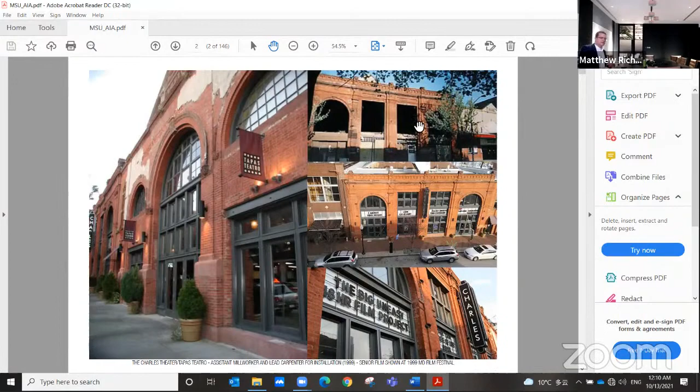I also became the lead carpenter on the installation for the Charles Theater, where I installed the whole facade. I worked with Steve, we built it, and that was a great project. On opening day, I also got to show my senior film from film school, so it was quite a nice project to be involved with.

I also started doing my own projects. I got my contractor's license and would take historic barns and historic houses in Mount Washington and renovate them. This was my main project—this is the house that I still own. I bought it when it was in very poor condition.

This is one of the first 6 houses in Mount Washington. If you look here, this is the American AIA chapter, Baltimore chapter from 150 years ago. One of these guys, this was his house, Thomas Dixon. He's also the architect for the Mount Vernon Presbyterian Church and the gatehouse for, I forget the name of that building. Anyway, very prominent architect in the 1860s and 70s in Baltimore, and this was his rural Gothic cottage.

So I bought it, it was in very bad shape, and I restored it. It took me about 7 years. I won the Mount Washington Improvement Association Award, a CHAP Award, and a Maryland Historical Trust award. This is some of the interior, some of the details that I restored on the inside. This was a great project. I got to live there for a little bit, and it was kind of a culmination of my carpenter career.

In school at Morgan, this was my second year studio project. We joined a competition, and I actually was lucky enough to get 3rd place in an international design competition. From that, AIA decided to sponsor me to go to the AIA meeting in LA that year, which was a great honor. I got to go out to LA and see the case study houses and go to the conferences and learn a lot more and get exposed to a lot more.

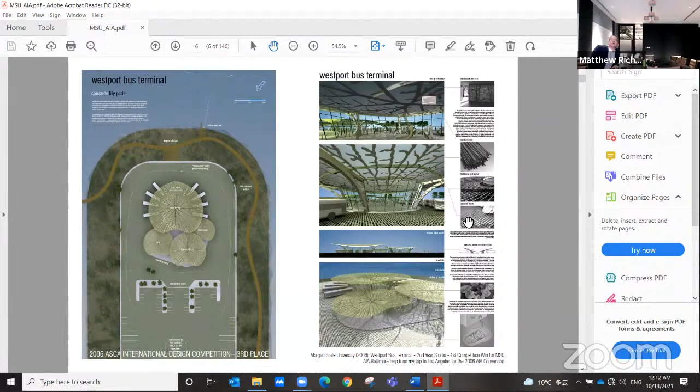This was my senior thesis project I worked on with Steve, and this was a proposal for, at the time, the Contemporary Museum. We chose a site which was a parking lot, and I don't know what it is now. So I went out and did field studies. I did all the CAD drawings for all the buildings nearby, and I tried to basically design a building that I thought would fit into the urban fabric as well as be something new. This was something I was very concerned with at the time. I kept reading a lot of articles, maybe with Ed Gunts, or just being part of the Mount Washington Improvement Association.

Just like, what can you do in Baltimore? It seemed very conservative to me, and I wanted to challenge that.

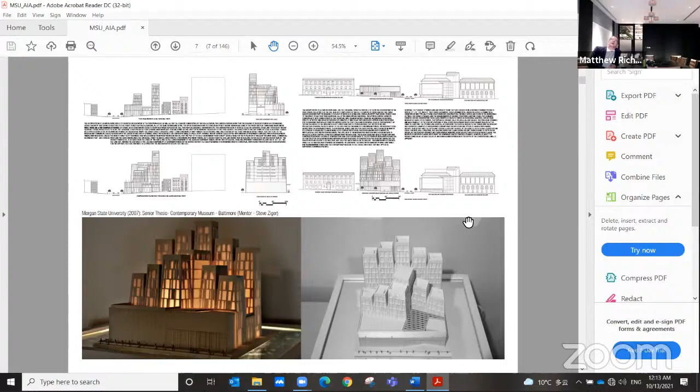So here's some of my intern work. This is a project Charlie did, a renovation. I just did what interns do. I went out and did measurements and basic drawings.

This is with Doug. What was this? The National Cryptologic... oh, maybe I shouldn't say. Then I worked with Steve on the Rashfield proposal and the Gilman Library extension. And then these were with Parameter. This is Silo Point. I got to do reflected ceiling plans and then some elevations for the Learning Center in Hampden.

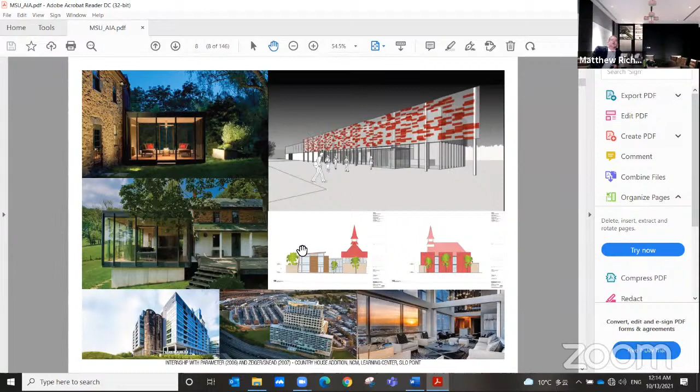So these were great experiences, and it was really fun to work with those guys. Here are some of my classmates at Morgan. I was there from like 2004 to 2007.

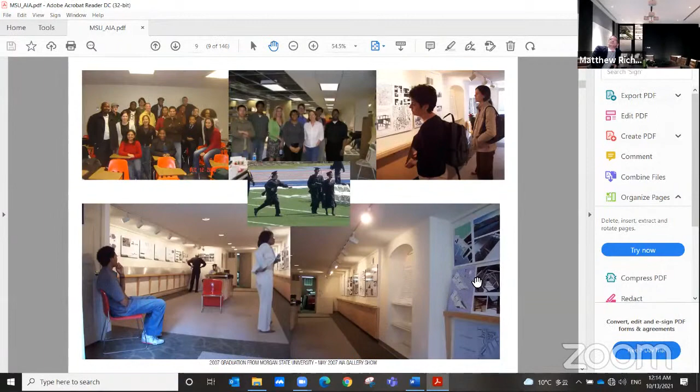Jay and I, after we finished our studies, we did a gallery show in the basement at the AIA, and that was a great experience. Then I graduated — you can see me here. Here's Jay and I'm running across the football field with my degree. I was very happy to move on to the next chapter.

At the time, I was exposing myself to a lot of lectures. I really didn't know architecture — I kind of came to architecture later. My friend said, your bus pavilion is really nice, you should see this artist, Zaha Hadid. She has a gallery exhibition at the Guggenheim.

So I went up to New York — this is 2006 — and that was a fantastic show. Then there was another one at the MoMA called On Site: New Architecture in Spain. Here's looking into the door there. This really opened my world to this amazing contemporary architecture that's going on.

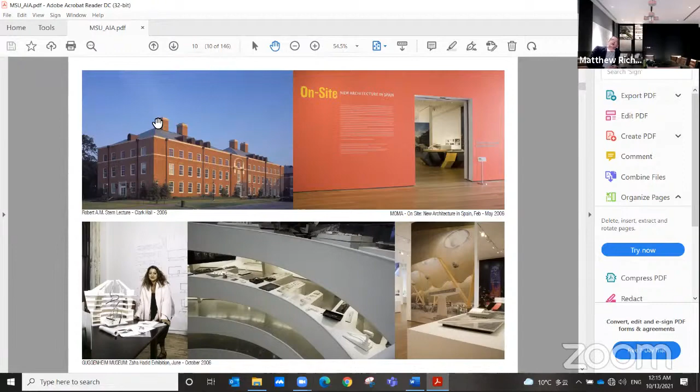I also went and saw Robert Stern speak in Baltimore, and I was very turned off by his speech. He was just very kind of arrogant, really talking himself up. And I was just like, which direction do I go?

And there was nothing there. So I basically pounded the pavement for 2 or 3 weeks. I went to every design office that I could in Barcelona. There were about 35 of them, and I finally got lucky to get an internship.

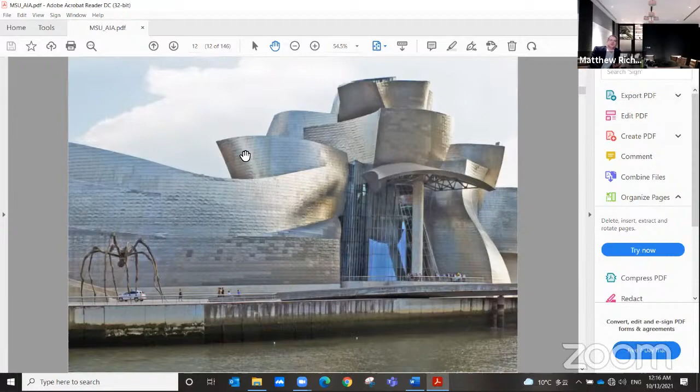So this is the Bilbao Effect. This is right after Frank Gehry's Guggenheim Museum. Every city in Spain wants one of these to be something special, so Spain is investing a lot of money in contemporary architecture. This was very exciting to me. These are some of the buildings that I would see.

So I was doing an internship, and on the weekends I would just, they had these like $50 airplane tickets. You could fly somewhere in Spain and then rent a $20 car, a little Pepe car. And I drove all over Spain, and these are some of the wild things that I would see.

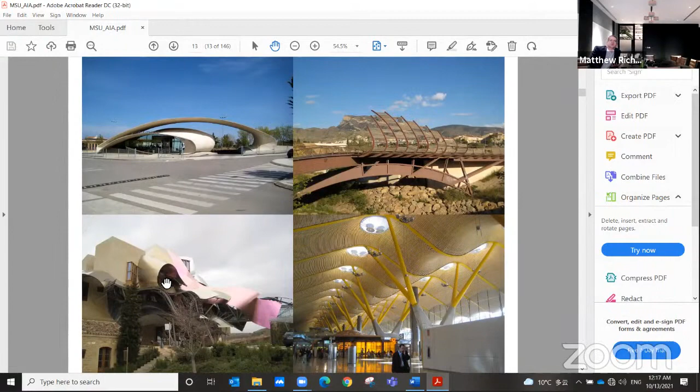This is an airport. This is Frank Gehry Winery. This is just a bus station by a professor, a Spanish professor. This is Enric Miralles' Bridge.

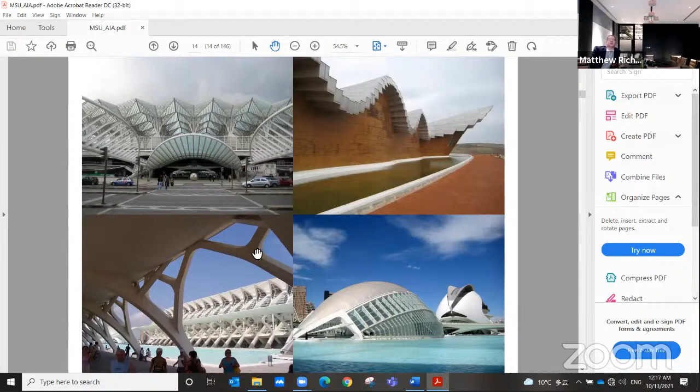And then there's Santiago Calatrava, just one of my favorite architects. He does this really wild, innovative work. I'm sure if you haven't heard of him, you should look him up. But it's great work. And then this is Herzog de Meuron.

They basically took this brick warehouse, cut out the bottom floor, lifted it up, and did this amazing structural lifting to open up and invite you into this museum. And with this green wall, this was a great project.

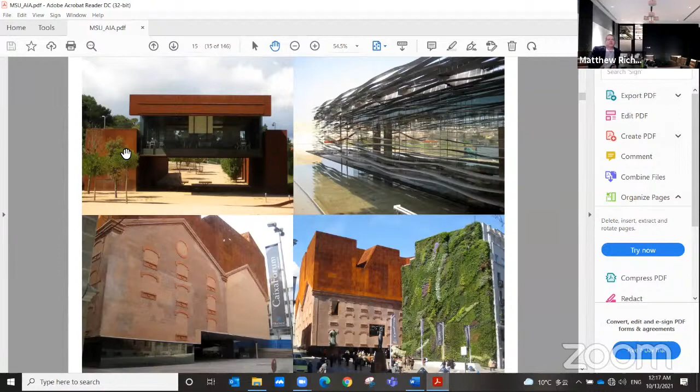And then on the top is RCR Architects. They did boxes, fantastic boxes, just lifting, pushing, and pulling. I would say in Spain I saw just a lot of box projects, amazing boxes, anything you can do with a box.

And you'll see later on, I'll show a bunch of buildings that are inspired by form, but I think fundamentally I learned a lot in Spain by seeing what you can do with a box and what you can do with a budget. That was just a great lesson for me.

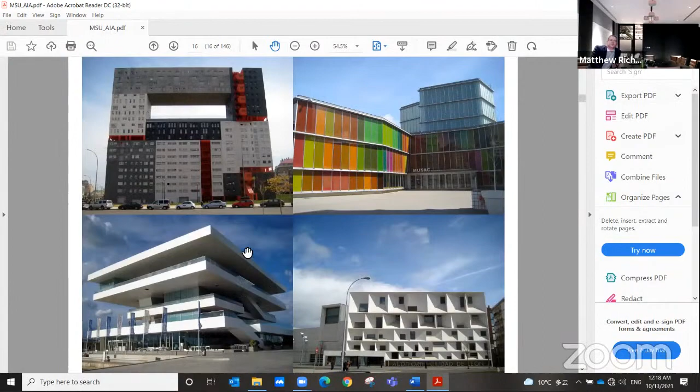This is Mansilla Tuñón, two great projects - this is the Museo de Arte Contemporáneo, and this is a music hall. This is David Chipperfield. This is MVRDV, a housing project.

So I got my first internship with this guy, Fermín Vázquez, and he was a local architect collaborating with Toyo Ito and Jean Nouvel. I was very fortunate to get my first project working on a Jean Nouvel tower. This was kind of post opening, just doing building a model.

And I got to build some models for Toyo Ito, and this was just, straight out of school, I was so excited. But on that job, I couldn't pick up Spanish quick enough, and they quickly learned that I wasn't really adding to the conversation.

So I was back on the street, and a couple of weeks later I landed a job at Enric Miralles' firm. I really encourage you, if you haven't been exposed to his work, it's amazing. He's considered one of the best Spanish architects. He unfortunately died in 2000 during the construction of the Scottish Parliament.

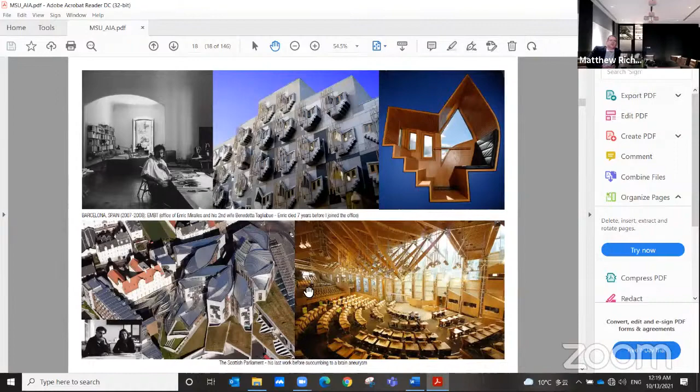One of my favorite stories about him is that he got to a point where he was really tired of other architects, or he felt he had learned everything. He took all of his architecture books and threw them in the dumpster, and said he's never going to look at anyone else's work again. He just drew and kept drawing since then, and created some of the most interesting work.

This is a roof that he did in a fruit market in Barcelona. This is a Gas Natural tower with a huge cantilever. This is archery for the Olympic Center. And he does amazing parks.

Now, one thing I did learn there - what we did was just a lot of copying. Since he was not around anymore to design, we copied a lot of designs and did competitions. We did what was called the Miralles Curve - he takes a line and another line in landscapes and gives it a fillet. This seems very basic, but this is something that at the Zaha Hadid office they had basically picked up on, and this was one of her favorite architects, and she uses this a lot if you go through and study her work.

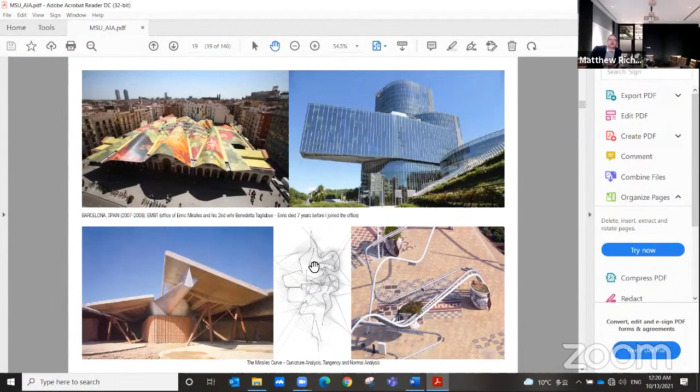So I did some animations, I did some 3D modeling, and I worked on basically two or three competitions there. And then this is 2008, and the Spain economy tanks. They're like, we're sorry, we just can't, we have to let a bunch of people go. So this will be the first time the economy kind of affecting my career.

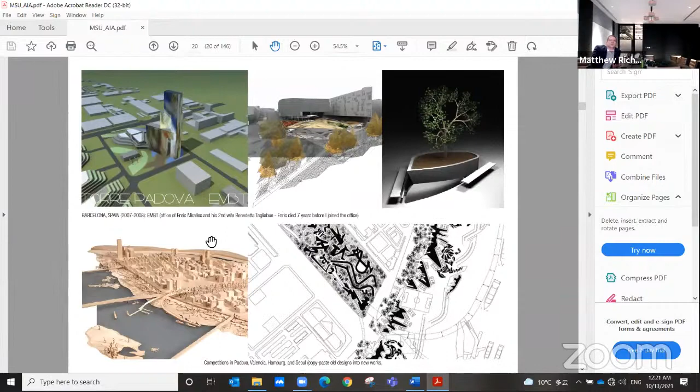So where do I go next? I got very lucky and landed a job at Lead Architects. I'm still not sure how I did it, but I was very persistent. I think I was brought in because I had construction experience and was a little more mature than the design team. So I was running the consultants between the MEP, the structural, and the client, holding conferences with all these on this first tower.

This is in Dubai. This tower never got built because it collapsed during 2008. This was a competition we did in Bulgaria. Kind of a fun project. I won't go into details, but this is some of the modeling I did.

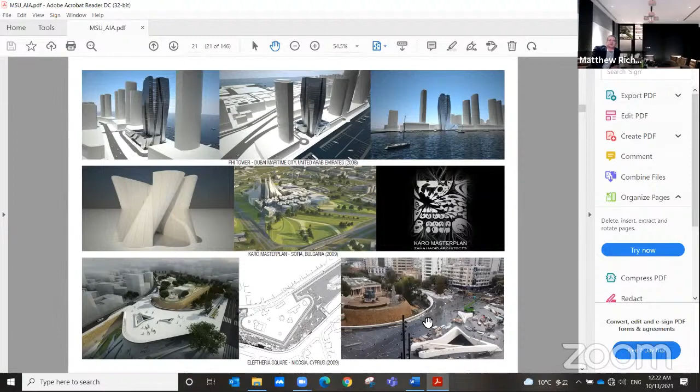And then this was a master plan for a park in Nicosia, Cyprus. They're building a bridge and a public park around an old wall. This is a walled fortress city, and this is the old wall of the historic city. So here I am getting to do contemporary design within an existing historic setting, which was very exciting.

Then I'm jumping around a little on projects. These are some of the Middle East projects I worked on. This is in Cairo, an exhibition center. There were 3 exhibition centers, a hotel, and apartment towers. I just kind of did some elevations and some 3D modeling.

And then this was going to be, believe it or not, Muammar Gaddafi's son, Saif al-Islam Gaddafi — they wanted to build the UN of Africa, and this is the People's Conference Hall, which was going to be the UN building of Africa. Basically this is 2011, the Arab Spring hit, and the office lost 8 projects in 1 week.

And they tried to hold on for a while, but basically they had to let a quarter of the staff go. And that was another time where I'm without work. Do I come back to Maryland, or where do I go? I decided to go back to China.

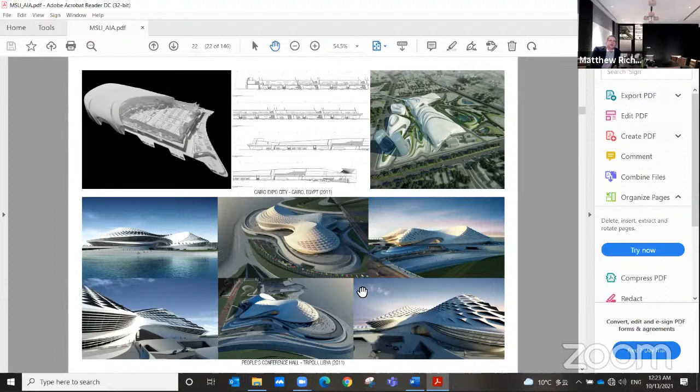Now I'm jumping around the timeline a little, but I want to basically introduce China. What is China? China is like an enigma to me. When I took my first plane ride there, I felt like I was going to fall off the edge of the earth because it was so far away, and I had never been there. I never considered living there or learning the language, and in school we didn't really study it.

And then as the economy opens up and starts building in the 2000s, it starts to become like a testing ground for new architecture. And because all of this Soviet or communist architecture is failing and these buildings need to be renewed, they're basically wholesale blocks getting torn down and redeveloped. This is a really exciting time.

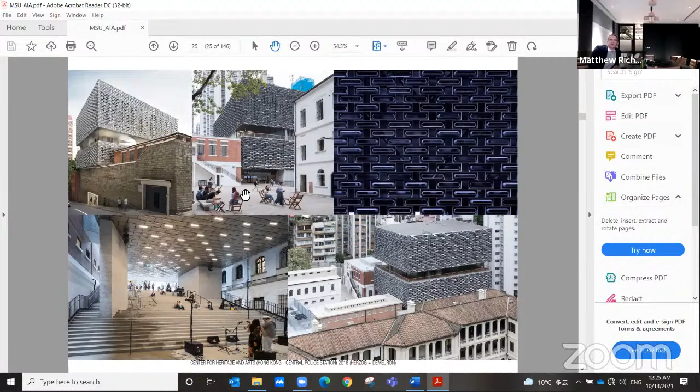This is kind of like a modern interpretation of a brick. They improve the public spaces. Herzog & de Meuron does a bunch of neat projects.

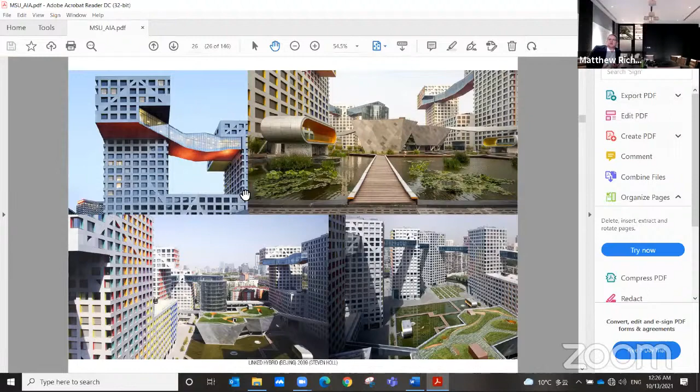This is Steven Holl, back around the Olympics time. This is a residential project. What he does is line the perimeter with buildings and link them by sky bridges. In the interior is this fantastic public space, and there's an art cinema called the Kubrick Theater that shows art movies. There are just some really nice public spaces you can hang out in.

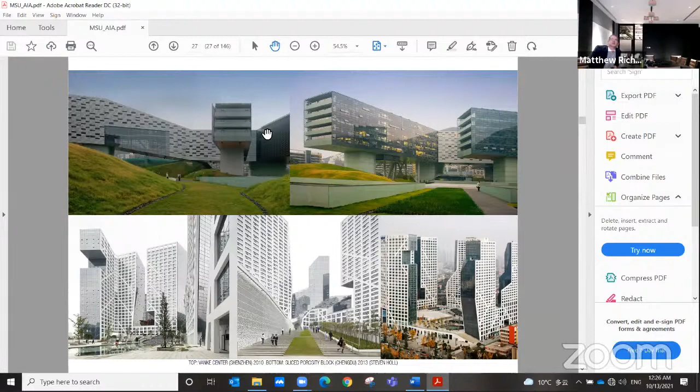He's also done a project in Chengdu called Sliced Porosity. Similarly, he runs the perimeter with buildings, creating dynamic public spaces on the interior. Then a project in Shenzhen called the Horizontal Skyscraper, the Vanke Center. He does really nice connections and basically lifts the buildings off the ground plane, with a lot of interesting public spaces underneath.

Okay, his name has just escaped me—he's a British architect, it'll come to me in a second. He did the Shanghai Pavilion. Someone wants to chime in? A bunch of my friends work there. This is a really neat Shanghai Pavilion that I got to see in 2010.

This is all seed banks, and these are plexiglass rods that let light in. This is the interior, with light coming through the seed banks. It's just a very fun pavilion.

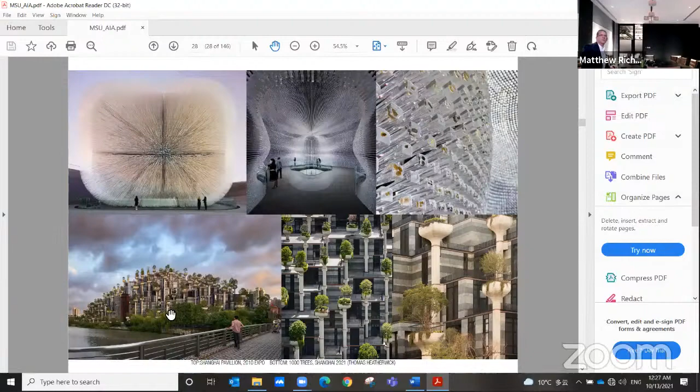From this, he gets the 1,000 Trees residential project, which is mixed use. There's retail in the base, and basically each building has its own tree. He's done...

Thomas Heatherwick. There we go, Thomas Heatherwick. This is on the Bund in Shanghai—a performing arts theater with a facade that kind of mimics bamboo. This facade rotates; each of the 3 layers will rotate and create a very interesting effect, exposing the building in different ways throughout the day.

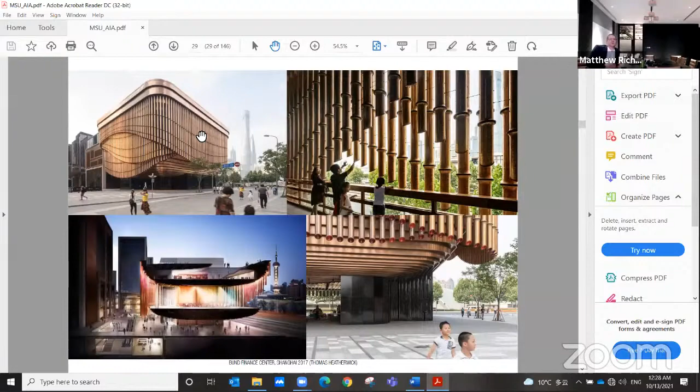You can open up the gallery to experience the inside, and there's a very nice public space underneath.

One thing we talk about is how to control the details. As foreign architects, we're not licensed to practice architecture here—we're basically a design consultancy, and only the LDI, the Local Design Institute, can stamp drawings and do construction drawings. So we work on a conceptual level and review the drawings; how closely you can manage the details depends on how the contract is arranged. KPF, Foster and Partners, and GMP are the three top firms that are able to get their specifications into the contract and really manage the details. They do nice work.

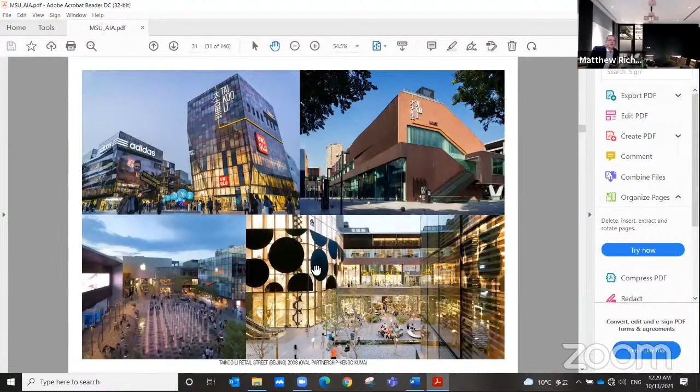This is called Taikoo Li, a retail street. It's a very innovative project that tries to mimic the street corridors from an old hutong, very closely, but with 2 or 3 levels, creating a 3D shopping environment that's outdoors.

This is another one in Chengdu also called Taikoo Li, with a more traditionally inspired architecture with a modern flair. That's a very nice project in Chengdu.

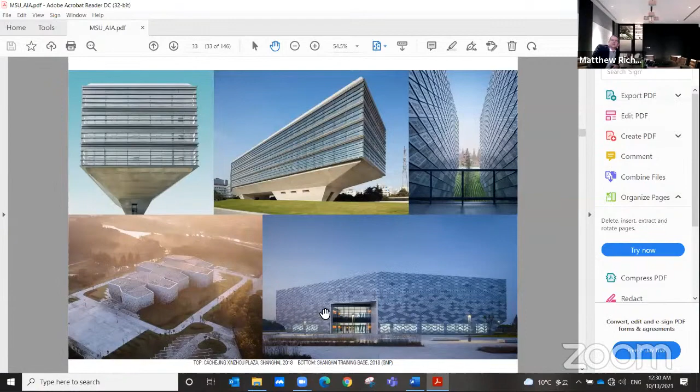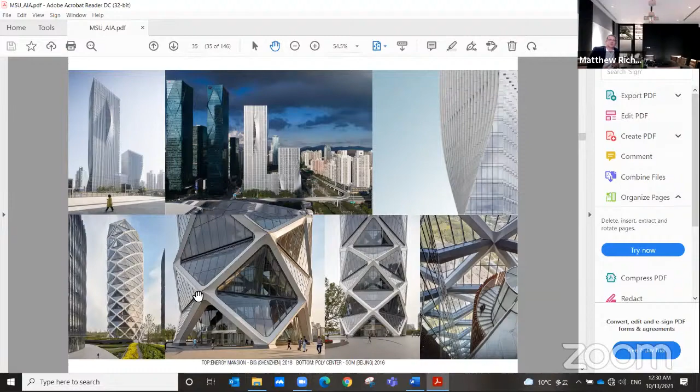This is BIG—Bjarke Ingels does some very simple news-worthy designs within a budget, and this is a very nice project tower in Shenzhen. Then this is SOM in Beijing. So again, I'm just trying to scratch the surface of some of the projects I find really interesting, that I found when I arrived or that got built after I got here.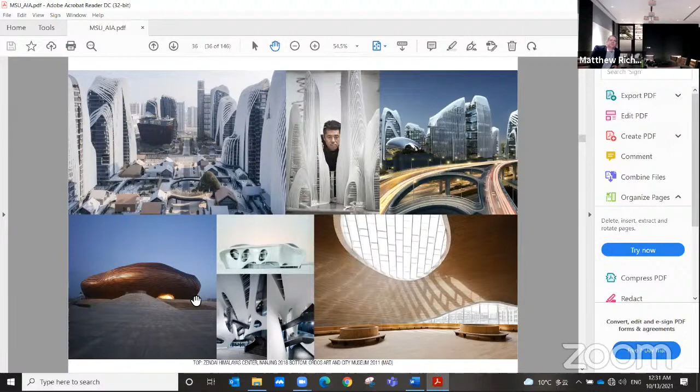This is an architect, a Chinese architect, Ma Yan-song. He worked at Zaha Hadid around 2002 or 2003, a couple of years before I joined. Then he went back to Beijing and started his own office, working in this style but taking it much farther.

He's gotten maybe 20 or 30 projects built here. This is an opera hall, very nice interiors, very sculptural. These are the more sculptural projects that get built. And this is in my neighborhood, I live right down the street from this.

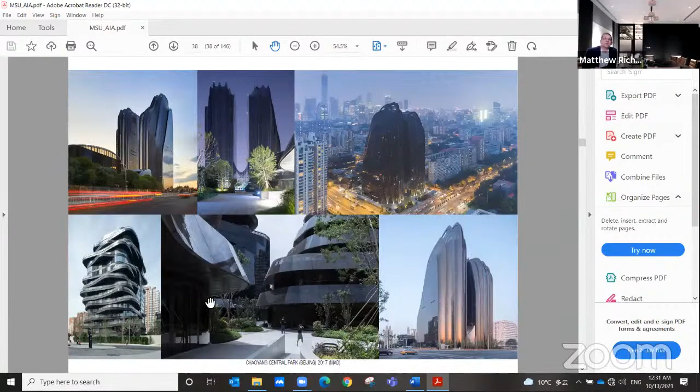This is an office building, and right next to it is an apartment tower with some retail around it. Very nice mixed use project. Then across the street from that is a TV station.

So let's go back. I'm working at Zaha Hadid in 2008, and I just get there, and within two months I get this email: we just won this project in Beijing, does anyone want to go? And I'm just like, that sounds great, but I want to stick around and see what happens.

So I'll come back to this. This is the last project I worked on, a competition in Nanjing that they won. These are two towers, a youth cultural center, and a hotel. Very nice mixed use project.

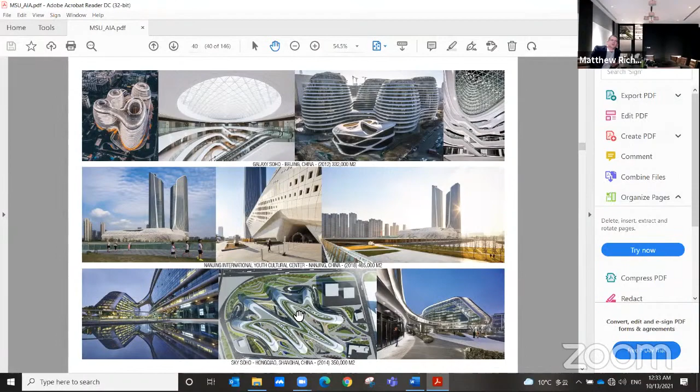Then this is another office building project in Shanghai. Friends sitting next to me were working on it, and it got built, and I got to visit it. Very lovely building. So my turn comes in 2010.

They won another competition, two towers. I jumped on that, took the flight to Beijing, and joined the team. They immediately had problems with planning and needed to come up with a new design. I was just one of about 5 people in the office that day, and we all came up with a proposal.

They were even walking into the room, almost forgot my model, but they took it in, came back half an hour later and said they love your option, Matt, it's going to be built. Fortunately, my option got built and got detailed.

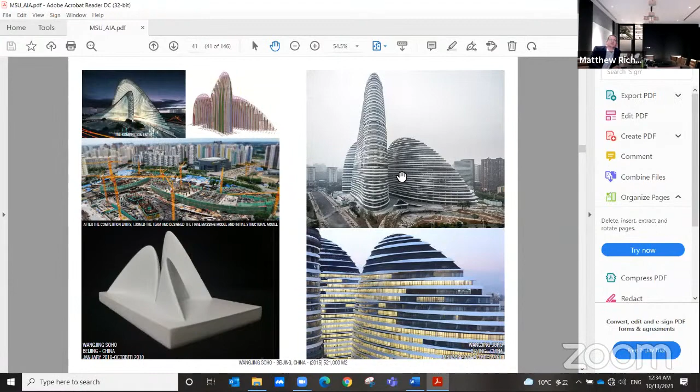My friend came up with the facade design, and I ran the structure team. I built the structural model in Grasshopper and was fortunate to interact with the LDI there. This was just an amazing stroke of luck to be in the right place at the right time, and this project got built. I can see it out of my apartment window, and also from work, so it's kind of special to me.

It's a lovely building, and it also has really nice plazas and public spaces. The landscaping is quite nice, there's a sunken plaza that steps down, and some waterfalls. If you go there on the weekend, there's tons of people out playing and utilizing this space. It's a great resource for the neighborhood.

It's not the best for retail, that was kind of designed last minute, so it has some failures. And of course there are some office spaces with diagonal columns that make it kind of challenging, but it's got a wow factor that's fun.

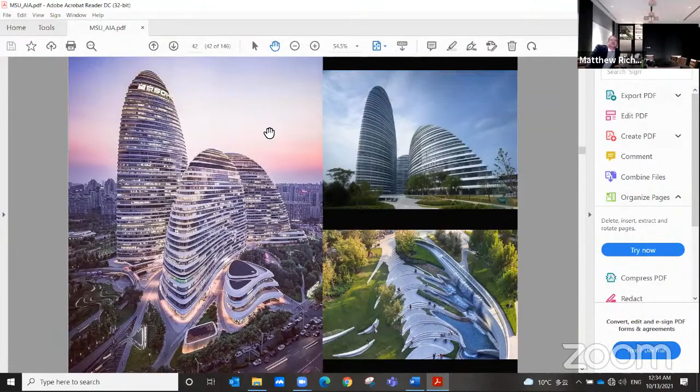Another friend of mine got to work on this. This is the largest airport in the world, Beijing Airport, which just opened a year or two ago.

I had actually moved back to China after Zaha Hadid, and I joined Foster and Partners, Norman Foster, and got to work on their competition entry. So it was Richard Rogers, Norman Foster, and Zaha Hadid, and maybe one or two others. Zaha Hadid won, and this got built, and this is probably the best detailed building.

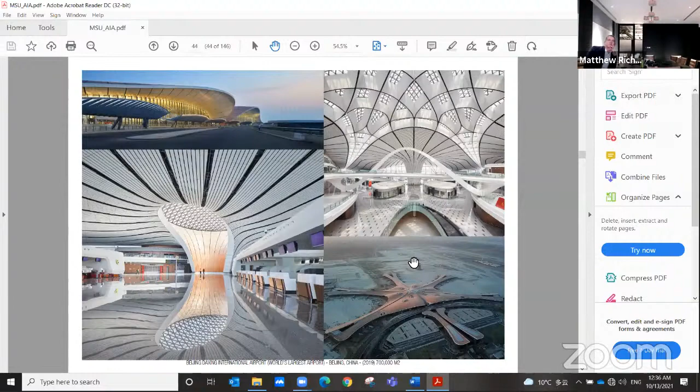These two are actually really built quite well. These are unitized glass curtain wall, and the LDI did a really good job with this building. The first Zaha buildings I showed you in Beijing, China have details that are pretty poor. They were built really quickly, but by now the quality's improved.

Now I'm working at Foster. I joined, and this is a project in Nanjing. I think it's a 300-meter tower or something, I can't read the bottom of my screen.

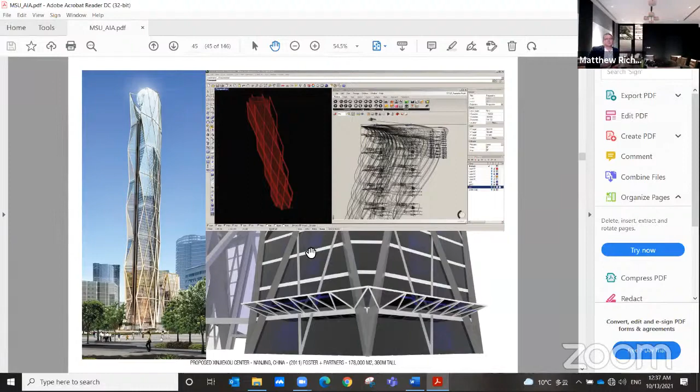I got into Grasshopper and started scripting, and used that for a couple of years, then I quickly learned that the kids younger than me were much better and much faster. So now I just kind of monitor it, but this was a great tool for scripting. I was able to run the structural models and help build the facades, and it really helped make things go a lot quicker when doing projects.

It's a great project. I was kind of upset they left me out of the competition, and I made a poor decision. I was upset with management, and being in Hong Kong, I wasn't in the main office, so I left Foster & Partners. I think that's one of my biggest regrets.

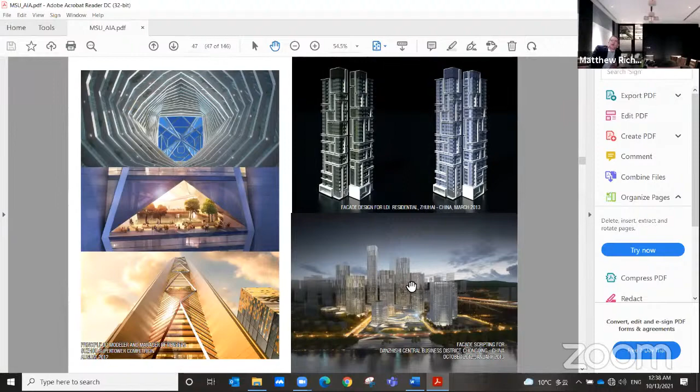I scripted these facades for an office development in China. Then we did a proposal for an airport, like an office complex next to an airport. We had to do a low rise, and I was kind of inspired by the Steven Holl project, so this is kind of my horizontal skyscrapers.

I started working for another guy doing some contemporary townhomes in Hong Kong, and kind of jumped around a little. Then one day I was just sitting out of work, on the beach, drinking beer on a Monday at 1 p.m., and I got an email in my inbox.

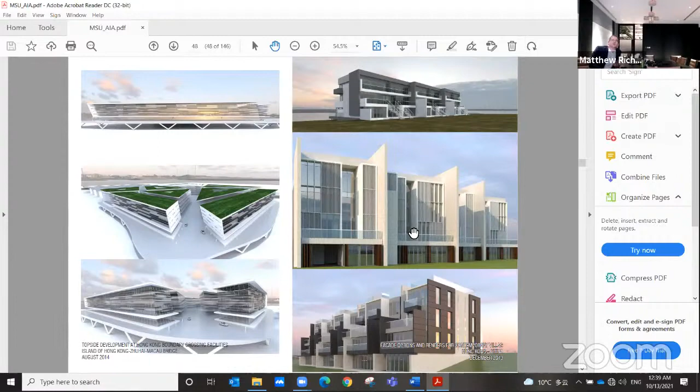A guy says, I got a great job for you in Sri Lanka, it's for a guy named Cecil Balmond, are you interested? I said he's my hero, I would love to. So let me give you a little introduction on Cecil. He's this really kind of guru structural engineer. He worked at Arup, started in 1969, and tries to study nature and integrate forms in nature into structure.

He started in 2000 what's called the Advanced Geometry Unit. He basically hired a bunch of mathematicians, engineers, architects, programmers, and artists, pulling this group together to see what you can take from music and artwork and nature, study the patterns, and bring that into our structural team, and start coding it. They start doing coding, which is very influential, and he was one of the first at the forefront of bringing Grasshopper script coding into geometries, into architecture.

He also did what's called the Serpentine Pavilions in London, starting around 2000. Every summer they invite an architect who hasn't built in England to do a pavilion.

He did the structural engineering and design work with Toyo Ito on this one. This was Alvaro Siza, and this is OMA. He works with Alvaro Siza, basically doing the structure, and they do this draping pavilion for an expo in Portugal. It's a draping piece of concrete that encloses a public space, just this amazing catenary arch.

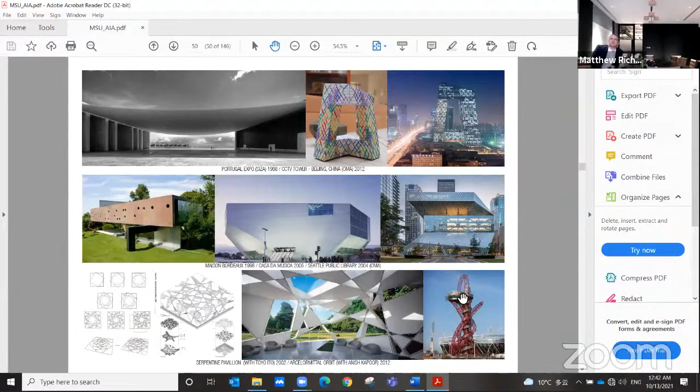So fast forward, I'm working in Sri Lanka. These are some sketches. He's teaching at UPenn at the time and flying to Dallas on a project, sends me from the airport some iPhone sketches on an app. He's like, this is what I want you to do.

And I basically developed it into this model right here. I do all the Rhino modeling and all the designing, and I'm living in one of these buildings, looking at the site from my window at night and traveling Sri Lanka during the weekend. I'm there for 2.5 years and do the whole facade package and construction drawings.

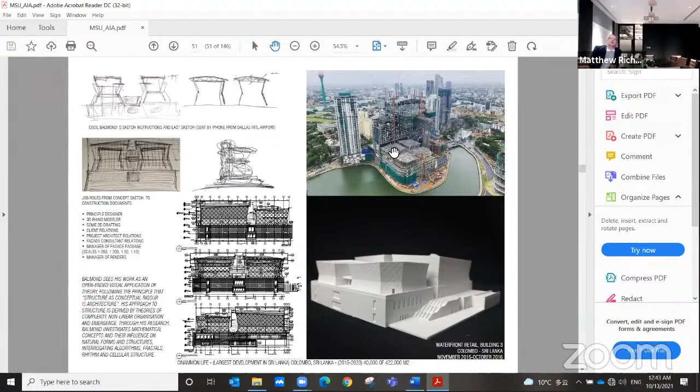This is for a retail mall, the largest project in Sri Lanka. It's on top of a parking garage backed by a hotel, with office towers. It's a crazy project with some crazy cantilevers. I think it's a mess, but it's also kind of fun.

These are renders of my work that kind of stick out. This is the shopping mall, with outdoor pavilions facing the waterfront and outdoor dining. I need to keep rolling.

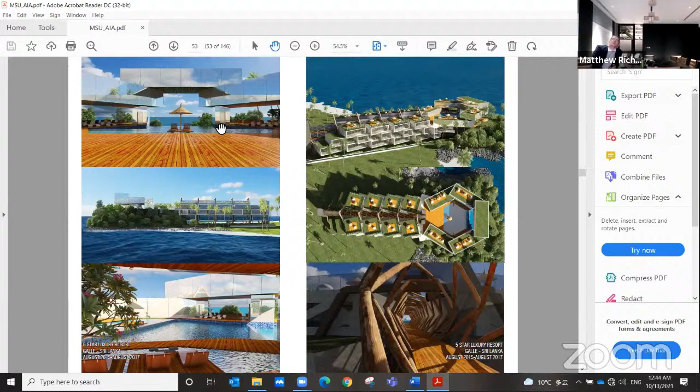This is a resort that I helped design with them. These are inspired by honeycombs, and they each turn and face the ocean, resolving in a final geometric area with a pool facing the water. Really nice project, I think under construction too.

Then I moved back to Shanghai. I get a design director job with a lady who works at KPF, and we do a bunch of proposals, including for a 500-meter super tall tower in Xi'an, another city in China.

These are 2 proposals that I did, and this is the atrium that I modeled and designed. I don't think this project is under construction.

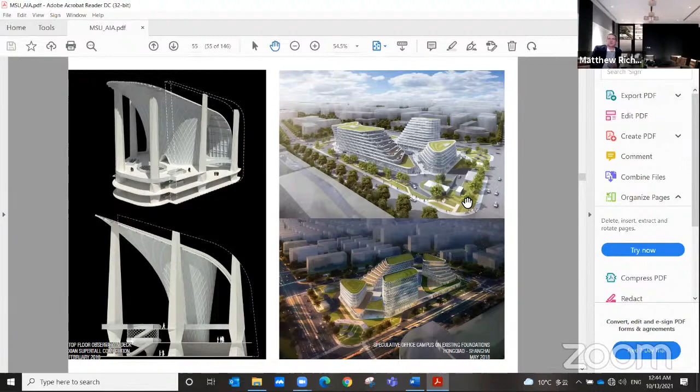These were for a project in Shanghai. The basement had already been built, and the developer wanted a newer design for the office. So we tried to design with outdoor terraces and create some outdoor spaces.

This was some spec offices that were going to have air conditioning units in the windows, and I had to come up with a pattern to basically hide all of those grills so you didn't see the air conditioning units on the face.

Then I moved to Gensler and worked there for almost 2 years. These are some proposals. This is a tower where I did the sky lobby.

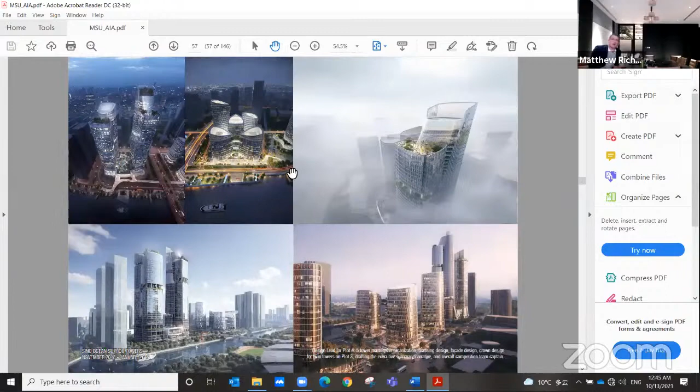I see I'm running out of time, so I'll flip through a bunch of these. This is another tower I did with 4 sky lobbies, one facing each cardinal direction, east, north, west and south, and they spiral up around the tower. You can kind of see these sky lobbies.

Okay, so the tower I told you I did the competition, it came back. I kind of got the job against it because they saw that I was the competitor at Foster and Partner. And this building, I was actually on the design team.

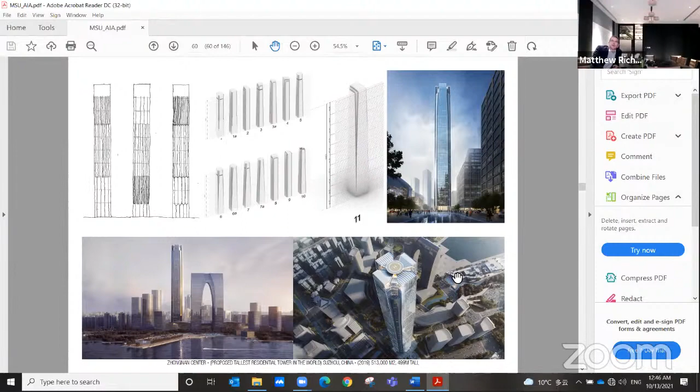This is the tallest residential building in the world, 500 meters. It's under construction. These are some early design drawings that I helped do. This is the finished rendering model.

And here's the tower poking above the clouds. This is actually the basement, a real picture of it under construction. There's about 100 people down in this basement with a bunch of cranes building it. That was a great experience to be involved in.

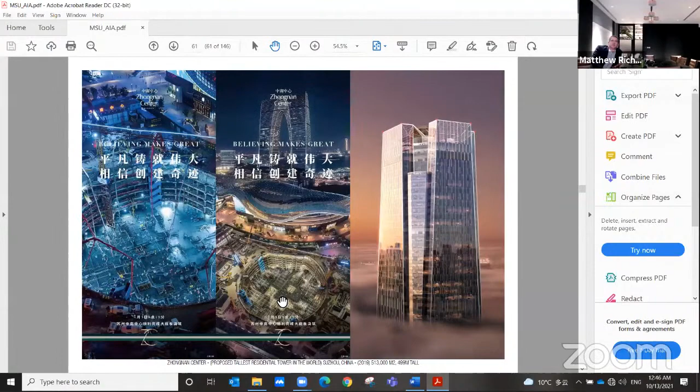And this is under construction right now. They're building the basement. This is the interior.

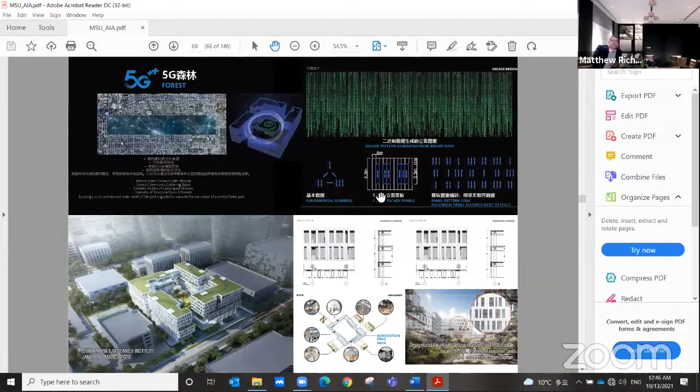This is another proposal. I'm going to fast forward through a bunch of these. These are a bunch of proposals that we did that didn't get built. These are some other office towers in Tianjin.

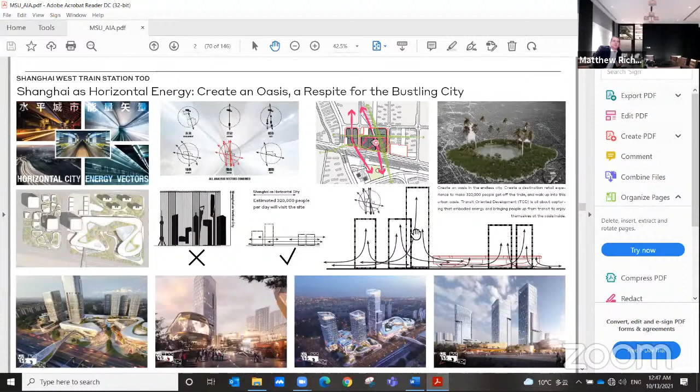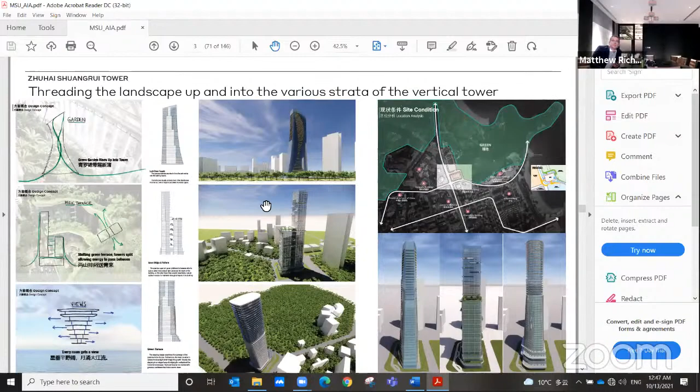My first day on the job, I work with some guys. We do a 3-day proposal for a mixed-use project in Shanghai. This is an office tower, mixed-use office and hotel, that we won, but it basically stalled.

This was another spec job where we do a mixed use with residential, office, and some retail buildings. And we try to talk about the public space and creating - this is the basic process, how we divide the site, subdivide it, create courtyards, terracing, and create lifestyle areas and shops, and we talk about connectivity.

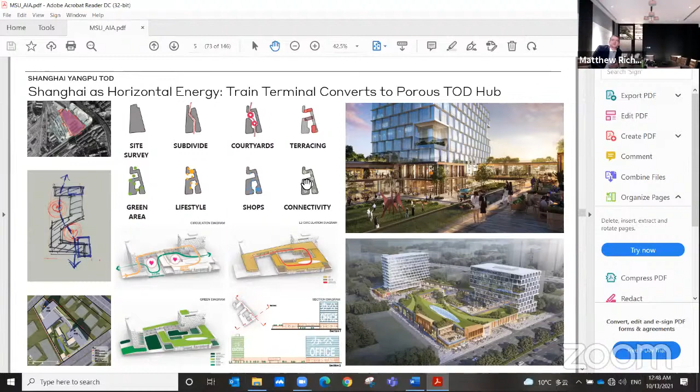In China, it's really about a narrative. You really have to develop a storyline to explain your design to the developer. And this becomes a crucial part of the presentation and the beginning of your presentation booklet.

This is a project that we won the competition, but then we lost it in the second stage because it was too complicated for them. We tried to basically build the narrative about a local park that talked about local folklore with a deer, stone, and water. And we tried to integrate that into the facade, into the terracing.

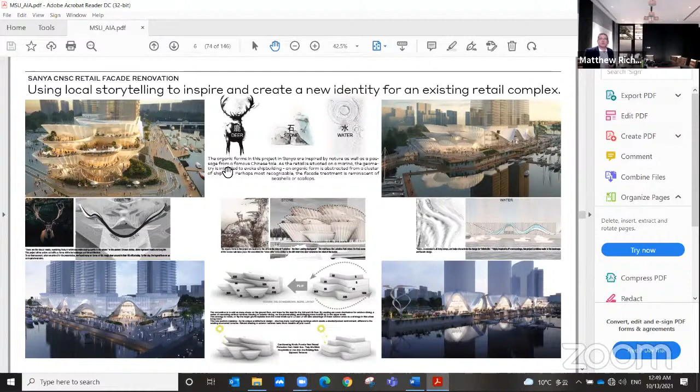It's basically a renovation project for a shopping mall. And I basically tried to say, look, take your existing thing and let's create some interesting terraces and create an interesting experience. That was a great project.

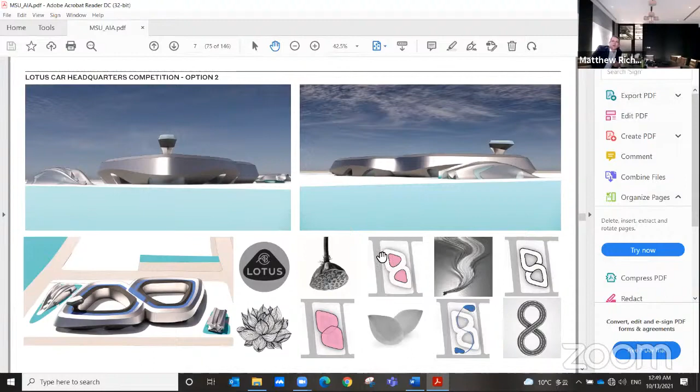It's on the waterfront. We tried to weave the water through the campus, and we tried to build the forms off of their branding and their logo. We try to talk about that a lot.

This is a very nice headquarter building that we designed, and this is kind of the narrative that we built.

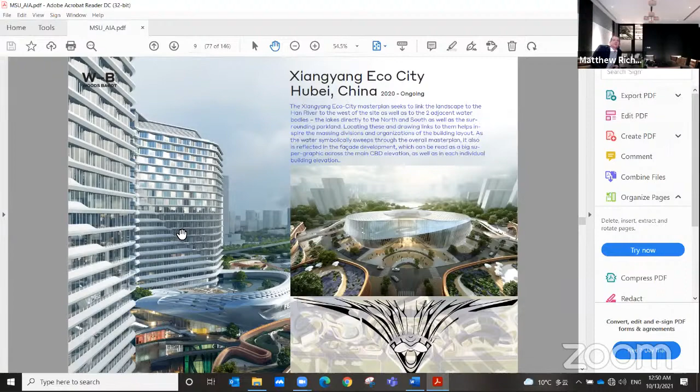Again, I'm trying to skip ahead to get to this, my main project. This is what I want to talk about. So I came up and I helped the team, I led the team. We won this competition. This is what I've been working on every day for the last year and 2 months.

This is the team, so it's a big group of people. These are my directors and these are some design leaders, but I'm basically leading the whole project and I'm responsible for a lot of the design, but we have a lot of talented people working on this project.

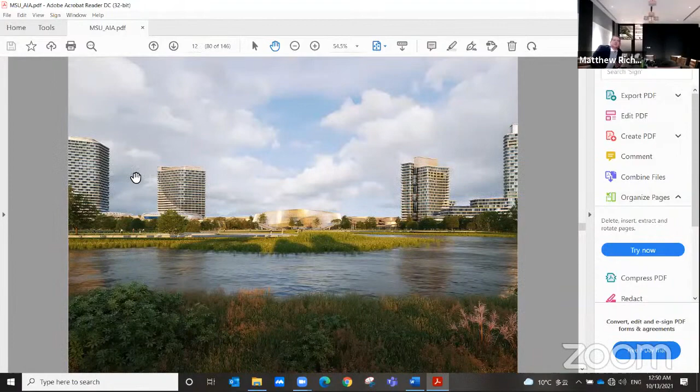It's an office tower, hotel, and residential tower. We didn't win this plot.

These were some more office towers, and it's the Forum, which is a government building, and then a retail street that surrounds it. Let me skip through. This is the shopping mall.

So this is the forum. This is basically like what I call my baby. I worked on this so hard, and we actually got planning approval last month, and we're having the ground breaking ceremony next week. I'm very excited and proud of this.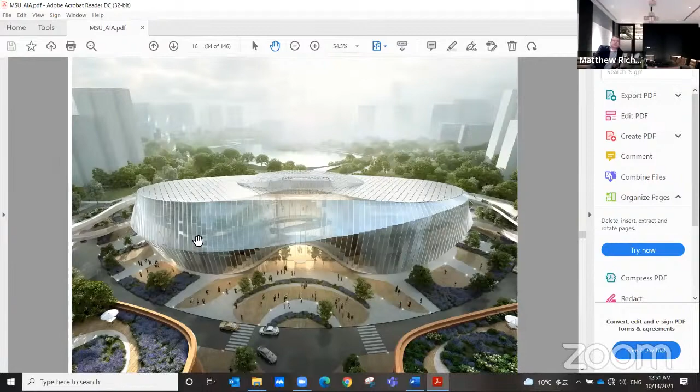This is basically like a conference center. We have 3 levels, and an atrium in the center, and we try to basically lift it to invite you into the interior, and you can see the park and the waterway on the other side. So we make it very transparent, and we make the conference area a little more opaque. This is kind of the entranceway, and you can see the entrance lobby there.

We built a retail street called Eco City. We like to use terracing and outdoor spaces to focus on the plazas and also pay attention to the forum, so you can do outdoor dining and face this government building. We're trying to link the landscapes.

The big challenge in China is how do you build in context? If you have no context, where do you create context? A lot of what happens in China, instead of building in the old part of the city, they'll create what's called a new CBD, Central Business District, and they build out in like a farm. This is a farm right now, and they are building—I've seen a couple of these built, one in Beijing, one in Guangzhou. You come back 5-10 years later, it's a city, as big as downtown Baltimore, and it just blows my mind how quickly these things rise.

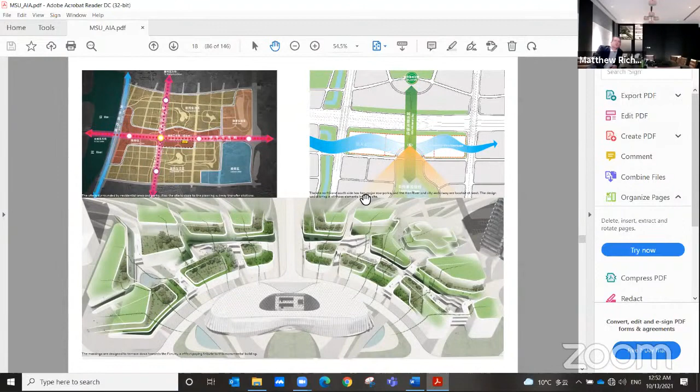I'll go back here in 10 years and this whole master plan will be built. It's such an amazing adventure to be part of this. We're building the headquarters, the central part of it. This is in Xiangyang, which is not far from Wuhan—it's a 2nd-tier city to Wuhan.

I'll skip through a little bit—I think I need to get back to the questions soon, but let me flip through. This is part of the narrative that we build. We talk about being influenced by the waterways, and this is the master plan we developed—the butterfly shape, the tree of life. We try to intertwine this into a narrative.

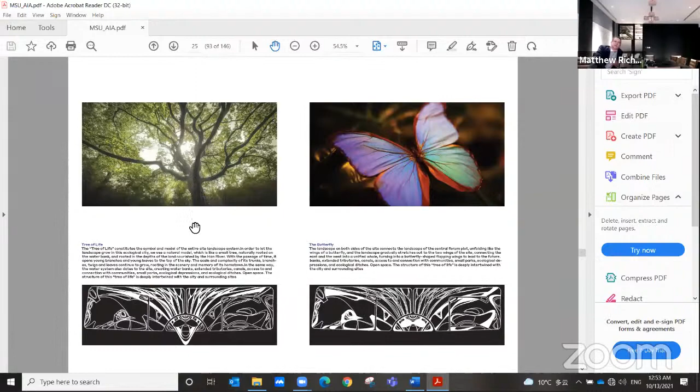Let me skip through a little more. This is the forum again, and these are some of the elevations. Well, this file's a little too big.

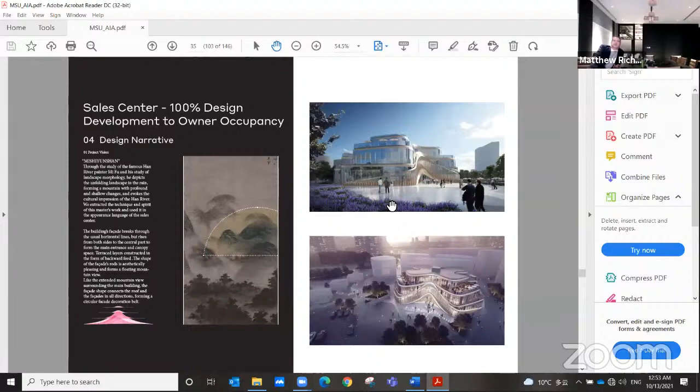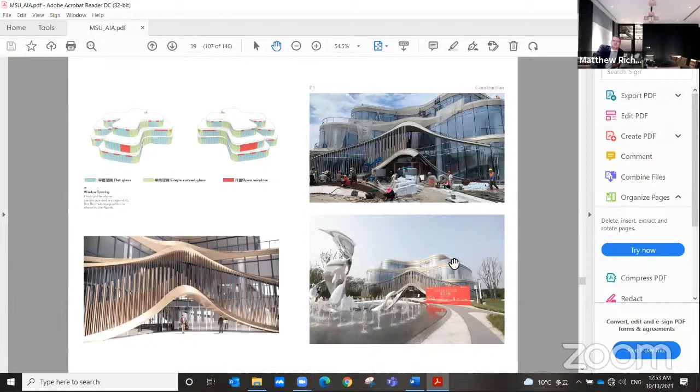This is our competition plan, and this is the sales center. We did the design last November, and they finished construction in January—it was amazing to see them build this thing so quickly. This is the lighting design, and here it is under construction. I got to visit and do a site visit, and this is the finished project. Things get built really quickly here. There's some things wrong with it—you don't want to get too close, but it's kind of a trade-off.

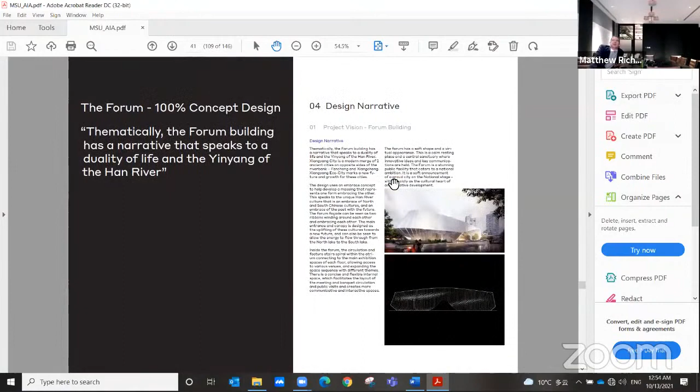I'll flip through more—this is the lighting design for the forum, and these are some more renders to show what the building will look like. This is the retail street, and these are some of the buildings. We try to talk about the Han River.

There's so much that I'm skipping over because I had to talk about so much, and I apologize for that.

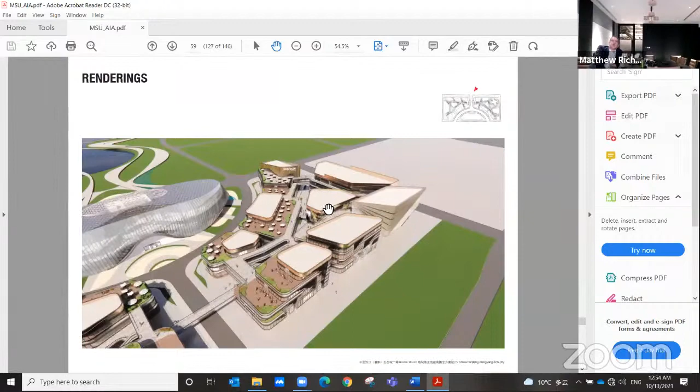We've basically gotten planning approval recently too—there are 3 stages, and we got through the first stage. This is the retail street and some of the anchor stores, and we're very excited about this. These retail buildings will include a performing arts center, and this will be like a bar and restaurant—what we call our anchor store.

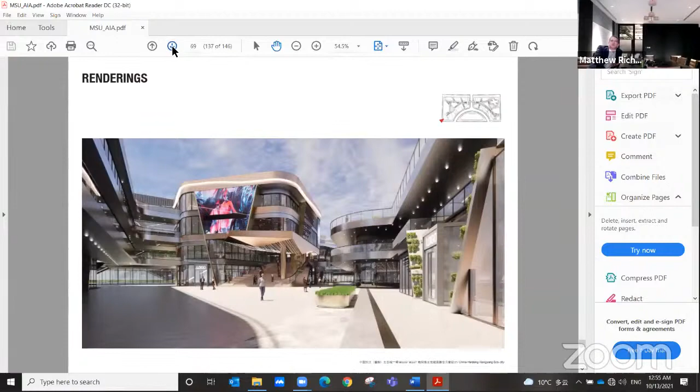We're inspired by wheat blowing in the wind, and that's kind of inspired our facade. It's part of the narrative, and these are some renders of our retail street and some of the plazas that will be part of the center of these areas. This is another corner building, which will be a tea house.

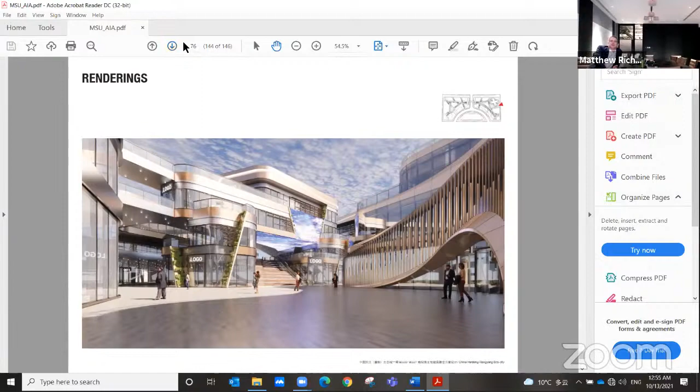This is Barcelona. This is London. This is my second London office. This is the Beijing Zaha office. This is Foster and Partner—there's Norman Foster here. This is another, 10 Design in Hong Kong. This is a Sri Lankan gang.

I'm doing a speech in front of 3,000 people in China. I did a couple of these—they're crazy, I'll tell you about that another time. This is with Gensler in Shanghai, and these are some of my crew here in Beijing.

So I get to meet wonderful people, work with lots of amazing people, really open my mind. I can't tell you how much traveling the world and working with many different cultures really opens up your worldview. It's a great experience. Sorry, Gabe, go ahead.

It's really amazing to see your journey, and to see that in many ways you thought of something that Baltimore didn't have, and you seem to have landed in it in such a major way. I'm really curious about your reflections on that, because you have the small, highly detailed project, and then these massive sort of projects that are emerging and seem to move at lightning speed.

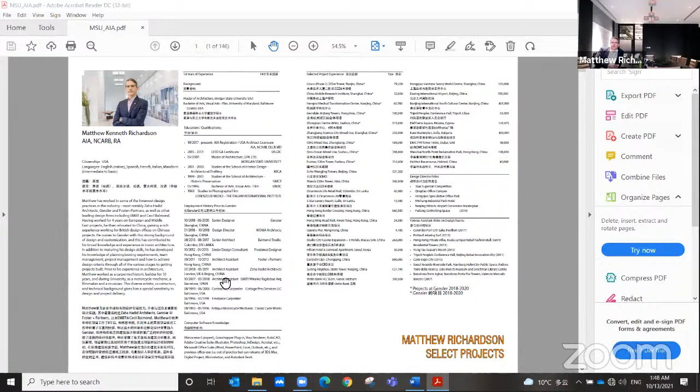If you reach out and get into one of these planning companies, just do your research—find out who the big players are, who's doing this stuff. Do an internship, either in the USA and then ask to get moved overseas, or do like I did and try to get a job overseas directly in one of these offices. Thank you. Yeah.